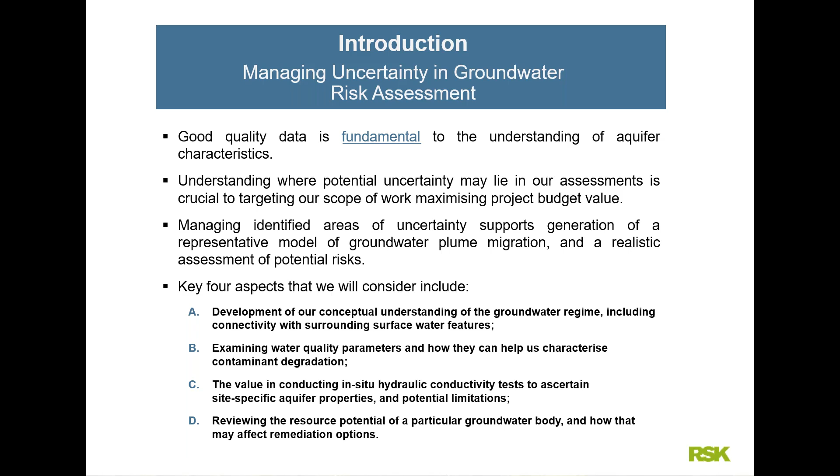We're also going to have a quick look at the value in conducting suitable in-situ hydraulic conductivity tests to ascertain site-specific aquifer properties and some of their limitations, and then also a quick look at reviewing the resource potential of a particular groundwater body and how that may affect our remediation options.

So the first of those aspects, developing our conceptual understanding of the groundwater regime — we're going to look at a case study, which is a vehicle manufacturing site located in the southeast of England.

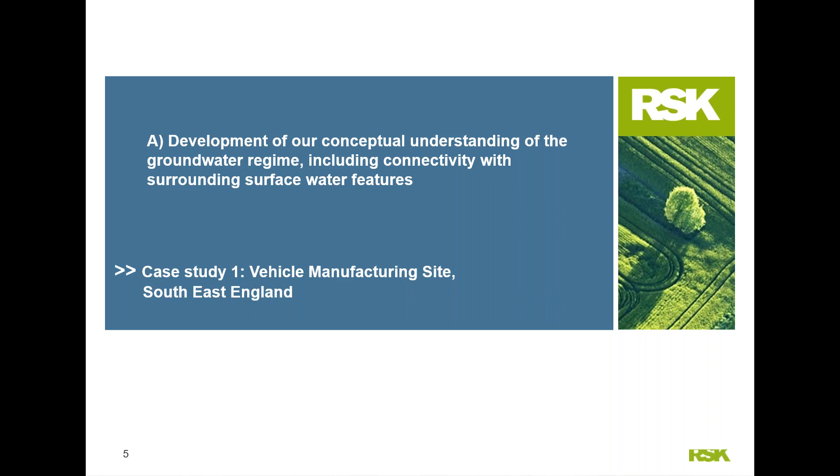RSK were requested to get involved on this site and review a raft of previous investigation information relating to the 30-hectare former vehicle manufacturing site. The site was proposed for a large residential development, including community facilities, schools, and commercial properties.

Overall, a total of 24 previous investigations had been completed across the various land parcels that made up the site. But crucially, there was no single report available to submit to the planning authorities which summarised all the work completed within the site boundary. Similarly, an overall remedial strategy was also required that encompassed the whole site rather than individual land parcels.

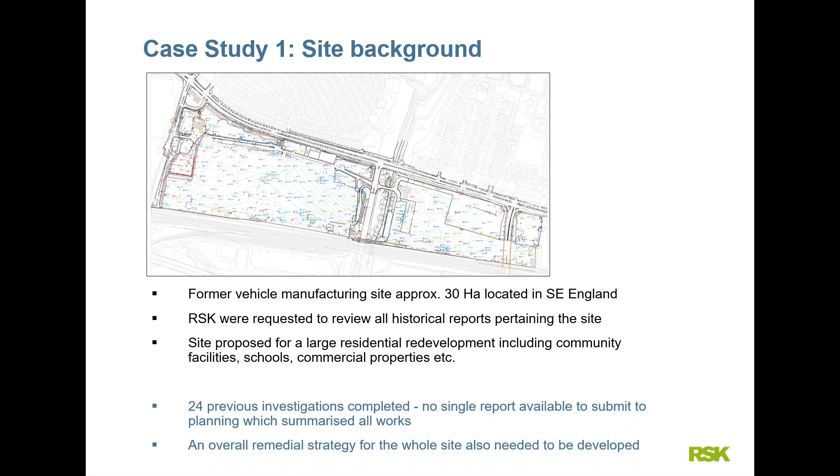In terms of the site setting, specifically the controlled waters receptors, in reviewing the site setting, numerous potential controlled waters receptors were identified. There was a river running from north to south through the centre of the site, with an infilled canal adjacent to the west.

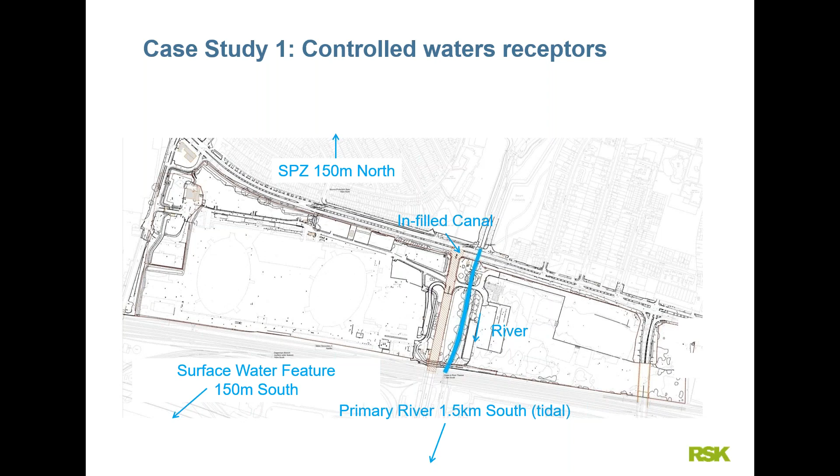There were also several surface water features located to the south of the site, including a tidal primary river located around 1.5 kilometres to the south, with the on-site river being a minor tributary to this primary river. Around 150 metres to the north of the site, there was also the outer limit of a source protection zone.

In terms of the site geology, the site is underlain by various water-bearing strata, as summarised in the table, with a basic geological sequence comprising made ground with pockets of perched groundwater within it, followed by alluvial deposits.

The alluvial deposits comprised cohesive layers with a peat horizon in between, and this horizon was classified as a secondary undifferentiated aquifer, with flow within that water body towards the on-site river, so west or east depending on which side of the site we were on.

Underlying the alluvial deposits, we moved into river terrace deposits, which were predominantly gravels, classified as a secondary A aquifer, with flow within those river terrace deposits towards the south, consistent with the direction of the river flow and the regional groundwater flow within that water body.

There was also a small 40 mil tidal fluctuation noted within the river terrace deposits groundwater levels, suggesting continuity with a tidal river that's located off-site to the south.

Moving through the river terrace deposits, we encountered Lambeth Group and Thanet Sands, both of which were classified as secondary A aquifers, and groundwater data within these water bodies inferred at least a degree of hydraulic continuity between the two groups.

The flow direction within these deeper water bodies was actually towards the north, towards the source protection zone. In the areas where the Lambeth Group was absent, the river terrace deposits had comparable water levels to those within the Thanet Sands.

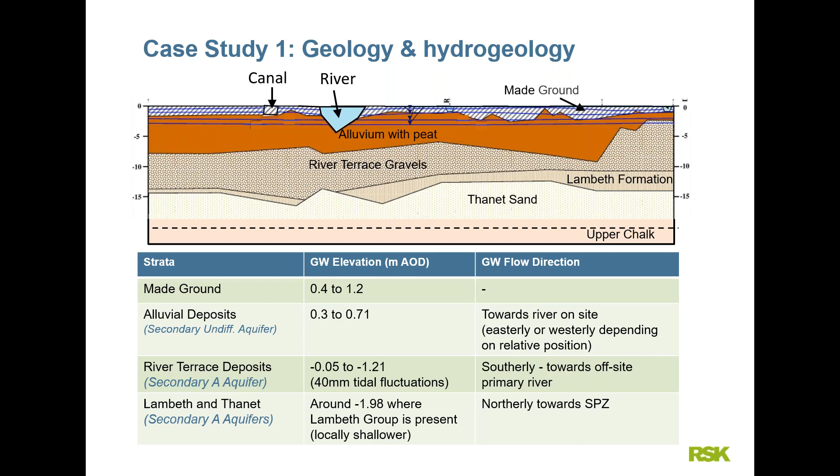But generally, the flow within the river terrace deposits was south towards the river. Finally, although not encountered on the site, the underlying bedrock at depth comprised the Upper Chalk Formation, which is classified as a principal aquifer, and regional data indicated a flow towards the north in this deeper water body, again towards the source protection zone.

So as we have seen, there are several water bodies present beneath the site, some of which are in continuity with each other and some of which are only partially or locally connected.

So in order to inform our conceptual site model further, we completed a survey of the river water levels and compared these levels to groundwater levels measured in nearby monitoring wells that were installed within the various strata.

The results of this survey, as you can see on the cross-section here, show that the perched water levels within the made ground were generally perched well above the varying river water levels.

Moving into the alluvium deposits, represented by the orange line on the cross-section, these were noted to be only marginally above the higher river level, but well above the lower level of the river.

Moving into the river terrace deposits, the green line on the cross-section, we were able to infer that the groundwater within the river terrace deposits was in continuity with even the lowest levels of the river level variations. And although not so shown on the cross-section, the survey of the base of the river level was indicated to be well above the level of the Lambeth Group and underlying Thanet Sands.

So overall, the assessment suggested that groundwater within the river terrace deposits and the alluvium, under some conditions, is likely to be in continuity with the river, whereas perched water within the made ground, and again the alluvium to some degree, may simply drain into the river.

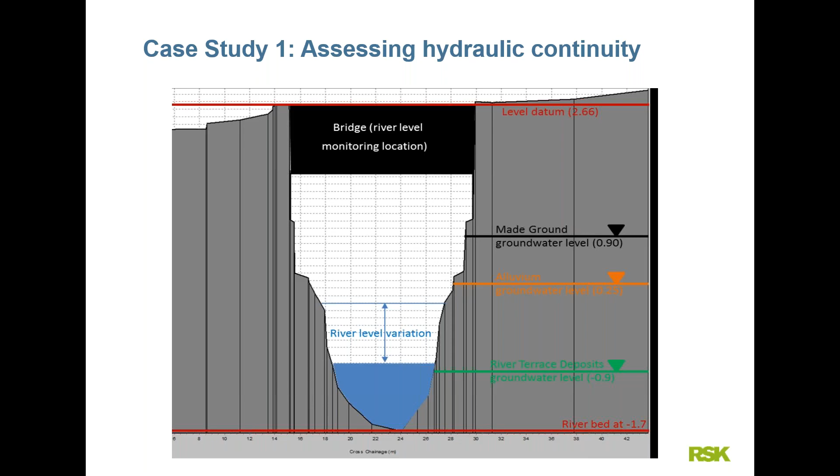So going back to the review of the previous investigation reports, which included a detailed quantitative risk assessment, we were able to make some key observations with respect to the prior understanding of the groundwater regime and the subsequent assessment of the potential risks to controlled waters.

There seems to be a limited consideration of the relevant potential controlled waters receptors when identifying the relevant assessment criteria to be used in the assessment, i.e. whether we're talking about drinking water standards or environmental quality standards.

When looking at the water bodies beneath the site, regardless of the connectivity with the principal aquifer underneath or the flow direction towards the source protection zone, highly conservative drinking water standards have been assumed across the board and applied in all of the assessments.

There was also minimal consideration of the brackish nature of the underlying groundwater, and also the fact that the site was located in a highly industrialised area. Therefore, the wider water quality and therefore also its resource potential was also known to be low, but this hadn't been considered in the derivation of assessment criteria.

So as a result, the previous DQRA that had been completed had derived some remedial targets, but these were considered unachievable and unreasonable. And it was therefore concluded that, based on our updated understanding of the groundwater regime, there was some refinement that could be completed on the conceptual site model and the conclusions of the risk assessment.

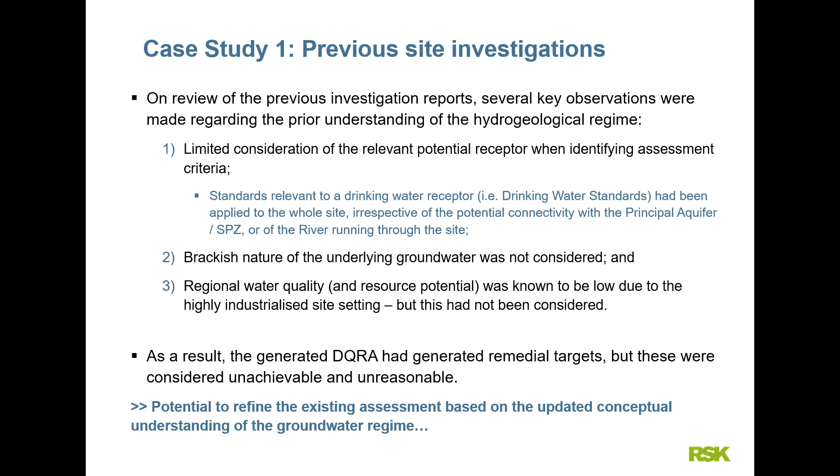Based on our updated knowledge, and in particular our understanding of the relevant receptors and their continuity with groundwater, the following updated conceptual site model was generated for the site in order to complete the first step of the risk assessment, the generic quantitative risk assessment. The key here was considering the relevant pollutant linkages based on each groundwater body and assessing the contaminant concentrations present within those water bodies against appropriate GAC, depending on the relevant pollutant pathway and the receptors in question.

So for the made ground, the alluvium and the river terrace deposits, this comprised an assessment of leachate and groundwater concentrations against environmental quality standards that were designed to be protective of the transitional estuarine and coastal waters, given our understanding of the continuity between these water bodies and the surface water features on and off site.

And then in terms of the underlying Lambeth Group and Thanet Sands formation, these were assessed against drinking water standards designed to be protective of the SPZ to the north and the fact that groundwater direction within these water bodies was flowing towards that SPZ.

In addition, an assessment of the regional water quality for each contaminant was also undertaken in order to assess the wider background concentrations of the various contaminants in the area.

Many of the contaminants that we had been considering were in fact found to be regionally elevated, so the upgradient concentrations on the upgradient site boundary were comparable to those on the downgradient site boundary, showing minimal variation across the site. On this basis, remediation on the site-specific scale was not considered to be warranted, as further ongoing risks to the surrounding aquifer was considered to be low.

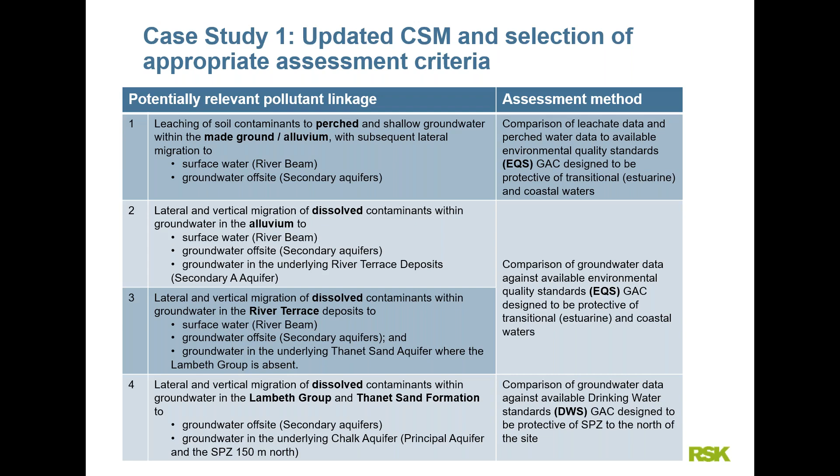So moving on to the second point that we're considering today, we're looking at examining water quality parameters and how they can help us characterise contaminant degradation.

The collection and interpretation of water quality parameters is key to characterising natural attenuation processes within the aquifer, and it's vital to understanding the key processes that may be contributing to the degradation of contaminants in the subsurface.

To characterise the potential for natural attenuation to be occurring, a robust conceptual understanding of the site is required in the first instance, including aspects such as the geology, the aquifer conditions, and also the contaminant concentrations and the potential for daughter products to be generated.

In particular, we can complete some fairly straightforward in-situ monitoring during sample collection that can provide us with beneficial water quality parameters that can provide a line of evidence towards understanding the potential for natural attenuation to be occurring.

And when assessing the attenuation of hydrocarbons, for example, the following water quality parameters should be collected in the field as a minimum, including aspects such as pH, dissolved oxygen, redox, temperature, and electrical conductivity.

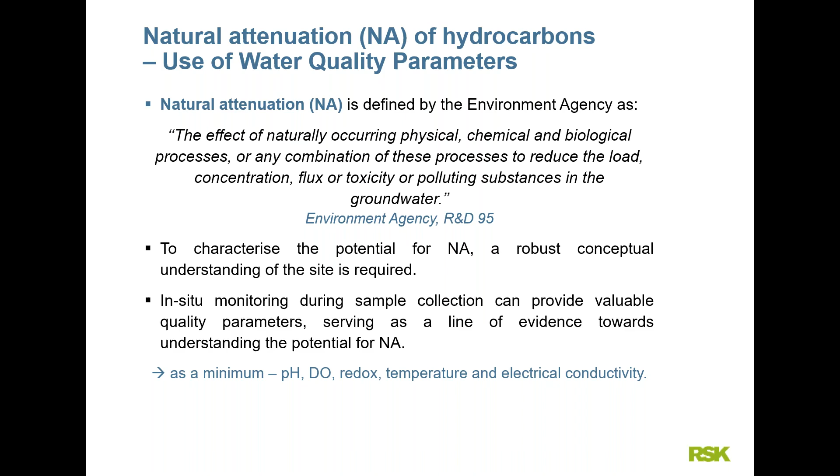So of these parameters, assuming that the groundwater pH is within the acceptable range to support biodegradation, 6 to 8.5, then we can look at the redox and the dissolved oxygen concentrations, and these will provide information on the type of metabolic pathways that are likely to occur in the aquifer.

Firstly, considering dissolved oxygen, we know that anaerobic degradation is unlikely to occur with dissolved oxygen concentrations above 0.5 milligrams per litre and will not occur at concentrations above 1 milligram per litre, whereas aerobic degradation requires the dissolved oxygen to be above 1 milligram per litre.

Similarly, looking at the redox values, we would expect to see mildly reducing conditions where our redox values range from minus 150 up to plus 50 millivolts, and then strongly reducing conditions below minus 200 millivolts. Similarly, above 150 millivolts, we would expect to see oxidizing conditions.

In terms of groundwater temperature, biodegradation will be slower at lower temperatures, and this can also affect the solubility of contaminants. So within the UK, considering our groundwater temperature is usually in the range of 8.5 to 11 degrees C, temperature can be a key factor when looking at biodegradation potential.

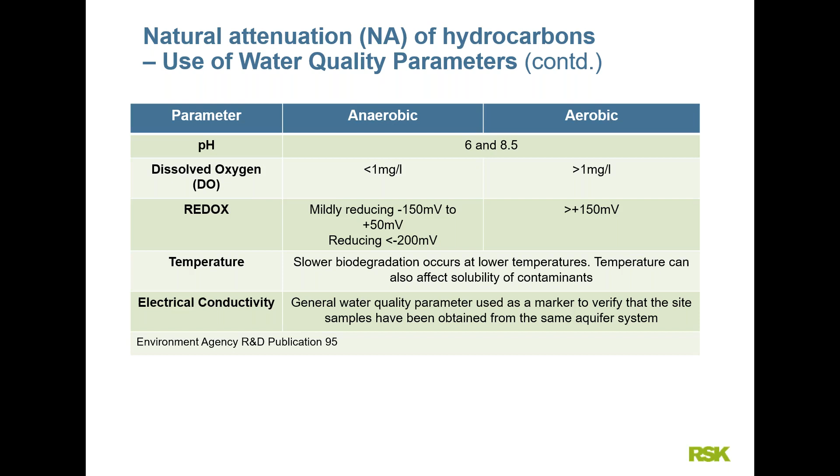And finally, in terms of electrical conductivity, this can be used as a general water quality parameter used as a marker to verify that the samples have been obtained from the same aquifer system to make sure that we're considering comparable samples.

As well as the in-situ aquifer data, we can also analyse our groundwater samples via laboratories for geochemical indicators of natural attenuation. To interpret these results, we consider that decreases in the concentrations of electron acceptors and corresponding increases in the concentration of metabolic byproducts provide indirect evidence for degradation.

Visual plots of the electron acceptors variation across the site, or of byproducts, can also help us visualize plume behavior, providing evidence for a shrinking, stable, or expanding plume.

As an example, referring to the aspects within the table, we would normally expect mildly reducing conditions to be associated with denitrification and manganese reduction. Subsequently, as the environment becomes more reducing, biological degradation continues on the basis of iron reduction, sulfate reduction, and methanogenesis sequentially.

A couple of points to watch out for when we're trying to interpret our geochemical laboratory data, with respect to denitrification.

The increase in nitrite within groundwater as a result of denitrification is rarely observed in our laboratory data. However, the relative reduction in nitrate concentrations within a plume is often noted, particularly when compared to higher background nitrate concentrations.

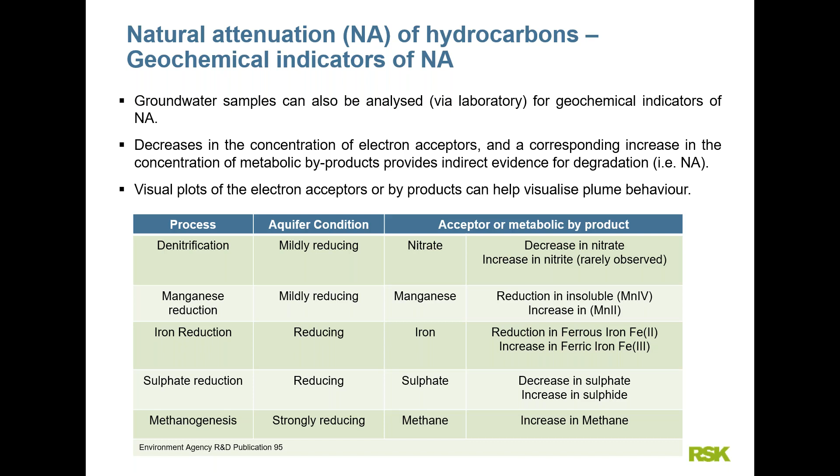To have a quick look at how geochemical and in-situ data can help us with characterising the degradation regime beneath the site, we're going to look at another case study: a petrol filling station located in Kent. It's an active petrol filling station in a mixed residential and commercial setting, with the closest residential properties around 20 metres south of the site. There's a primary river located 900 metres north of the site, and also the boundary of an outer source protection zone associated with an abstraction located 1.85 kilometres to the west of the site.

Previously, a programme of soils remediation had been implemented at the site due to historical fuel releases, and remediation had been undertaken as far as possible given the site constraints, but nevertheless some residual contaminants remained on site in the groundwater. So in order to assess the effectiveness of the remedial works and the impact of leaving this residual contamination in situ, a long-term programme of groundwater monitoring and monitored natural attenuation was commenced. The objective of this work was to understand the site groundwater conditions for the purposes of continuing environmental stewardship on the site.

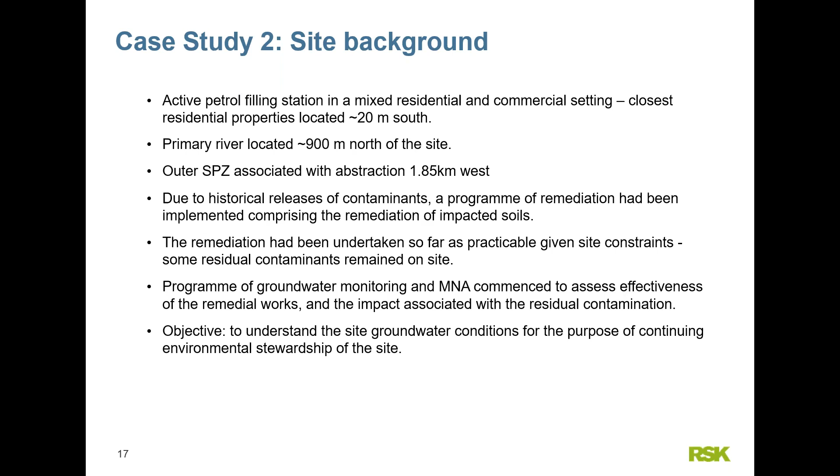In terms of the site-specific setting, the site is underlain by various geological strata, as shown in the table. Much of the site was underlain by made ground, moving into silty and clayey sands and gravels of the Taplow gravel formation, which was classified as a secondary A aquifer and noted to be dry during the drilling works. Underlying the Taplow gravel formation, we moved into chalk bedrock of the Seaford chalk formation and the Newhaven chalk formation, which was encountered as putty chalk becoming more intact with depth.

A groundwater body was noted within the chalk, with strikes during drilling starting at around 8 metres and rising to 5 metres below ground level, with flow within the groundwater body towards the north, in the direction of the primary river and the source protection zone. The groundwater data also identified dissolved phase concentrations of BTEX compounds - benzene, toluene, ethyl benzene and xylene - within groundwater in various areas of the site.

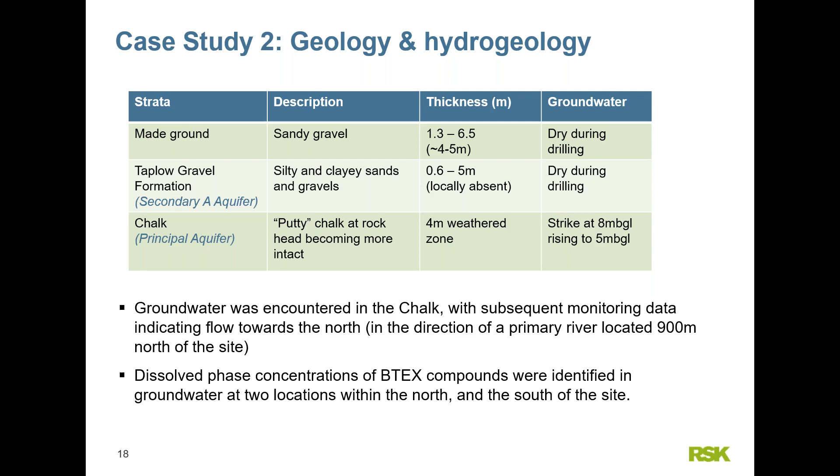Considering the full range of data, which in fact dated back to 2004, it was apparent that the down gradient northern plume had shown continuous reduction since 2004, with only limited concentrations remaining during the later monitoring rounds up to 2015. Whereas the up gradient southern plume area, whilst this has also reduced, is to a lesser extent and appeared to be stabilising in more recent years.

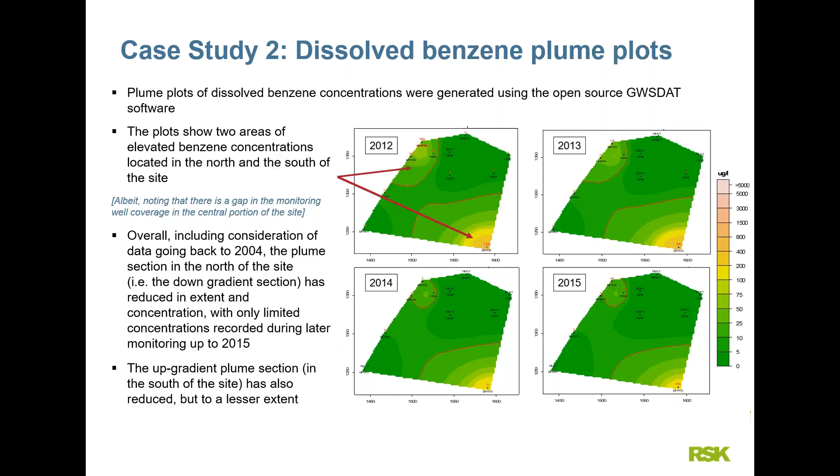Now, at the same time as the groundwater samples were being recovered by low flow groundwater sampling, we were also able to measure water quality parameters. A review of the dissolved oxygen and redox concentrations indicated mildly anaerobic to anaerobic and reducing conditions within the plume core, so within the north and the south of the site.

The presence of these sustained elevated methane concentrations was considered an indicator that methanogenic processes are occurring within those plumes. This ties in with the earlier data, the dissolved oxygen and the redox data, that indicated anaerobic and reducing conditions within the aquifer.

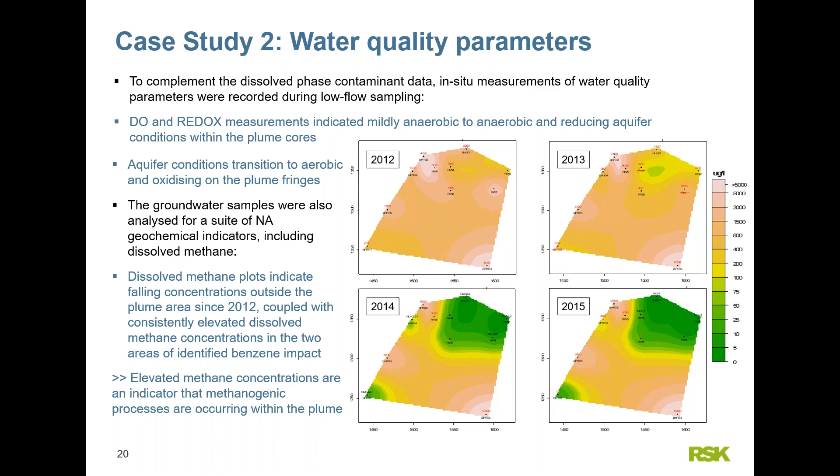So based on the evidence for ongoing natural attenuation, an assessment of the biodegradation capacity of the system is undertaken, considering the total BTEX concentrations beneath the site, in order to understand the potential for that natural attenuation to continue. Assessing the biodegradation capacity provides us with an indication of the amount of a contaminant that can be theoretically degraded by a particular electron accepting process at a site.

The assessment comprises calculating the difference in concentrations of the various electron acceptors at the up-hydraulic gradient site boundary, so considering the background aquifer conditions, and also looking at the conditions within the plume, and then dividing them by a utilization factor, which considers the preference of the various electron acceptors in being utilized by the microbes. This is a standard literature value that varies depending on the compound we're considering, detailed within the Environment Agency R&D P95 document.

Based on the calculations, we were able to characterize that the aquifer could theoretically provide the capacity for degradation of up to 17.7 milligrams per litre of total BTEX, compared to our on-site maximum concentrations of just 0.36 milligrams per litre. Overall, we were therefore able to reach the conclusion that the biodegradation capacity of the system is sufficient to degrade the present concentrations, with the primary mechanism in this instance being methanogenesis.

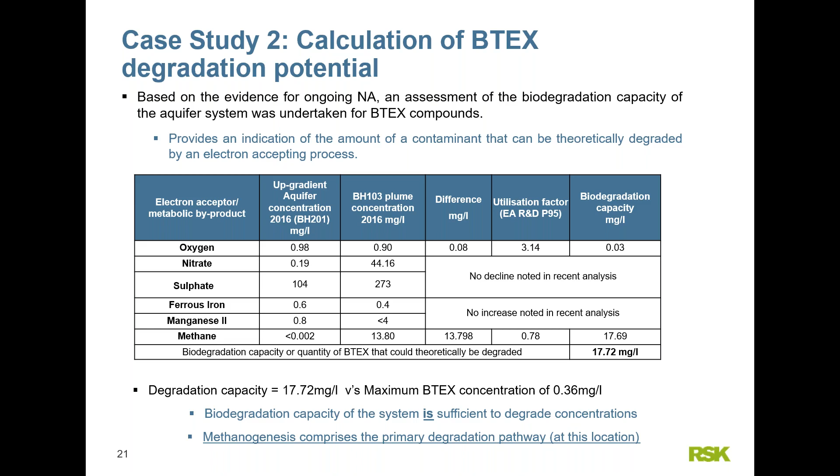On this basis, we were able to conclude that given the lines of evidence provided, continued natural attenuation of the residual BTEX compounds was feasible, and that no further remediation was likely to be required.

So moving on to the third point, looking at in-situ hydraulic conductivity tests. The identification of a representative hydraulic conductivity, or K value, for an aquifer is another way that we can aim to minimise uncertainty in our risk assessments.

If we don't have site-specific data, we're forced to rely on literature source values for typical geological strata, and these values can often range across several orders of magnitude, and it's simply down to professional judgment as to which value we select. The aquifer hydraulic conductivity is a highly sensitive parameter in contaminant fate and transport models, and it's important if we can constrain this as far as possible.

As an example, when we're considering a level 2 DQRA assessment, which considers the dilution of a contaminant as it enters the groundwater from the unsaturated zone, areas with a higher hydraulic conductivity result in greater dilution being attributed to more permeable soils. Looking at a level 3 assessment, which considers the dissolved phase contaminant migration within the aquifer itself, the K value influences the degradation potential for contaminants, with more permeable soils resulting in faster contaminant migration, and as a result, a reduced potential for degradation.

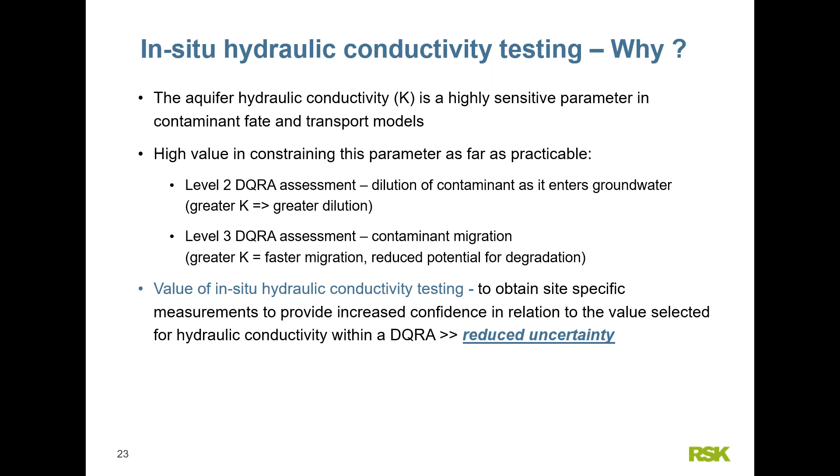So looking at our next case study, when we're assessing in-situ hydraulic conductivity tests, how do we do this?

It's most commonly completed via what we call a slug test, namely the introduction of a slug of fixed volume into the water column in a monitoring well, which results in an instantaneous change in water level, and then we monitor the change in water level with time as it recovers back to the resting groundwater level. A minimum displacement of the water level is required, ideally higher than 0.5 meters, but at least 0.3 meters, in order to make sure that we're testing the aquifer rather than the surrounding gravel pack of the well.

As such, it's important to note that traditional slug tests may not be suitable for very high permeability aquifers, as recharge may be so fast that recording the change in head cannot be completed sufficiently.

A couple of important points when considering slug tests. These are localized tests used to determine aquifer characteristics, and we need to optimize the robustness and value of the test data as far as possible. To do this, wells must be previously developed and then left to stabilize prior to testing. It's important to complete duplicate tests at each location to demonstrate repeatability, and these duplicate tests should incorporate both rising and falling head tests, as the recovery of each targets the saturated aquifer and unsaturated zones respectively.

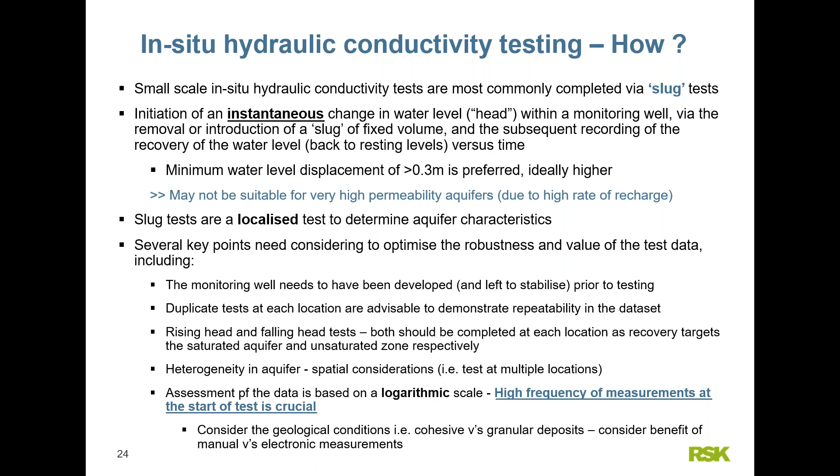On this basis, it's important to consider the anticipated geological conditions, i.e. whether we're going to encounter cohesive or granular deposits, and then whether or not we need to use electronic pressure transducers to monitor the recovery of water level, or whether we can manage this through manual measurements.

Looking at our third case study, a former factory site in Fife. This site was underlain by cohesive soils comprising clayey sand and sandy clay. Slow groundwater recharge was anticipated due to the cohesive ground conditions.

On this basis, the slug tests were completed using manual measurements rather than automated measurements, considering budget considerations versus the level of risk anticipated at the site due to the lower permeability material.

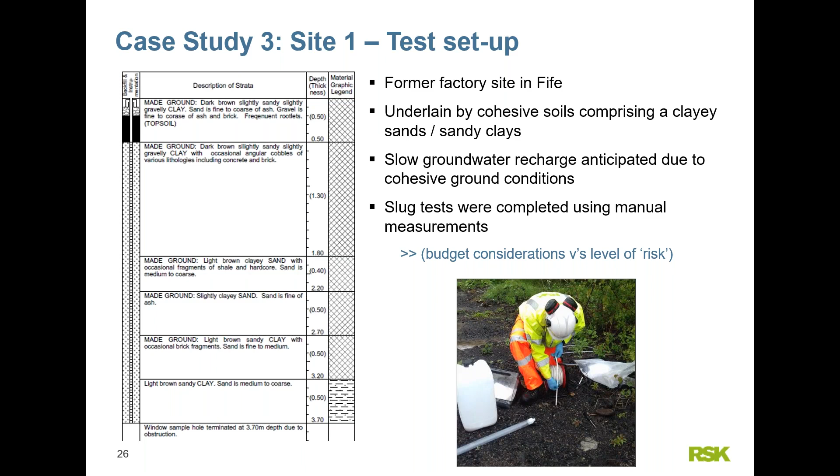The literature values for sandy clay range across 4 orders of magnitude, whereas completing the on-site slug tests allowed us to constrain this value down to within a single order of magnitude. The benefit of completing the slug tests therefore showed us that the hydraulic conductivity could be constrained to reflect site-specific conditions, thereby giving increased confidence in the model results.

However, in this instance, the limitation of completing the tests using manual measurements was that the earliest part of the data set, the first 10 to 15 seconds, was actually missed, and therefore there was a potential that we could have been under-predicting permeability if we had solely relied on the site-specific value.

So to take this additional uncertainty into consideration, a sensitivity analysis was completed as part of the DQRA, and during this analysis we varied the hydraulic conductivity by several orders of magnitude to test the results on the DQRA predictions.

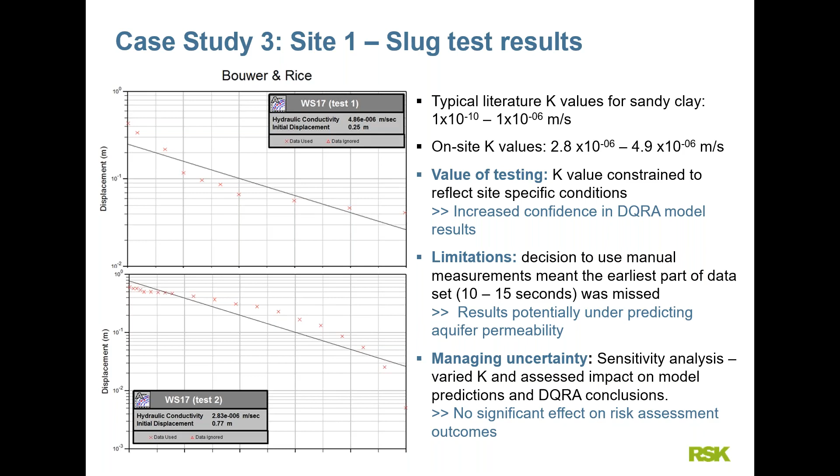The second site where we completed some slug tests was a petrol filling station in Aberdeen, and in this instance the site was underlain by granular sand and gravel deposits. On this basis, faster recharge was anticipated, and the slug tests were completed using pressure transducers set up to

record water levels on an automatic basis at 0.5 second intervals. However, crucially, we also used manual measurements as a backup just in case of equipment failure.

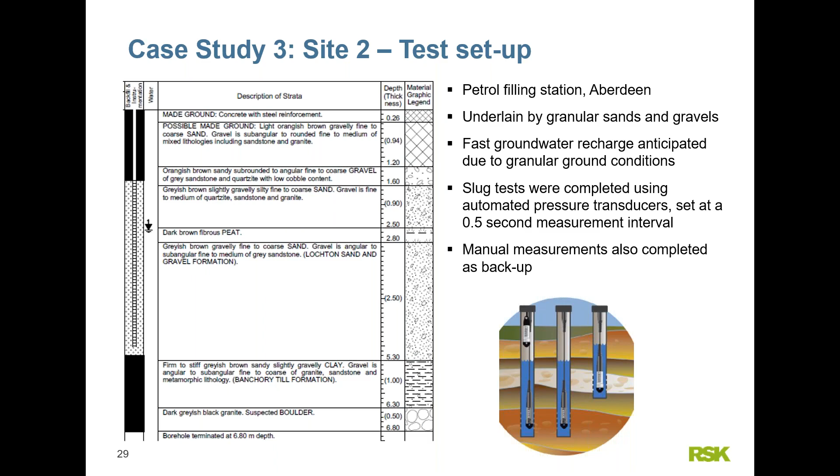Similar to the first case study, the slug test at this site enabled the site-specific value for the permeability used within the DQRA to be constrained down to within a single order of magnitude variation.

However, in this instance, whilst we were able to capture the early data set due to the use of automated loggers, we were only able to achieve minimal displacement of the water column due to the highly permeable nature of the strata, and therefore there is a potential that the results weren't necessarily reflective of wider aquifer conditions.

So to manage this additional uncertainty, calculations of the K value were also completed using the transmissivity and the saturated aquifer thickness, and the sensitivity of the model results to variations in the K value were also examined through the DQRA sensitivity analysis.

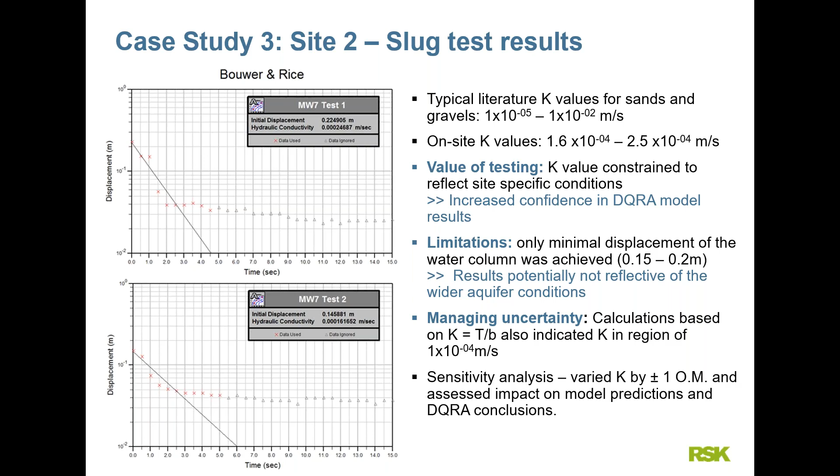So moving on to our final point, looking at the resource potential of a groundwater body and how that can affect our remedial options.

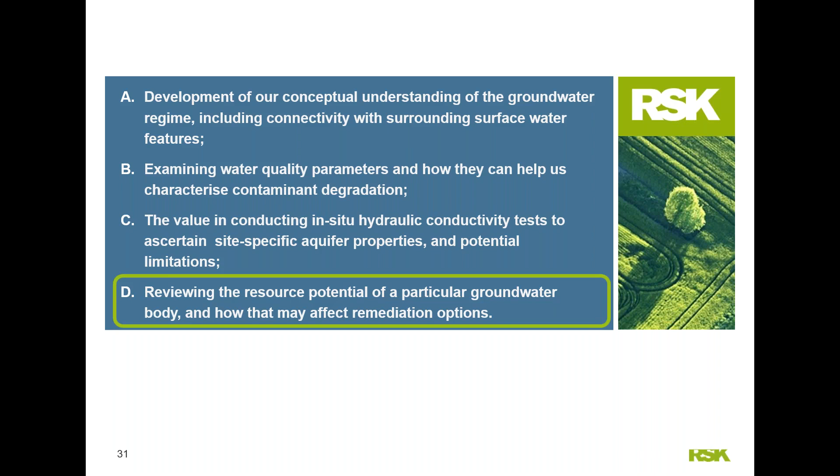Regulatory guidance on setting compliance points in a DQRA states that it may be justifiable to increase compliance point distances in a number of circumstances, i.e. beyond the default 50-metre point initially required if we're dealing with hazardous substances that are already present in groundwater.

Sustainability assessments would also come into play at this point, considering whether or not there is an overall net benefit or impact from any potential remediation that may be proposed. However, and crucially, extension of the compliance distance can only be done if there is credible information to demonstrate a significant physical constraint on the ability to use the groundwater resource in question.

These constraints can include where there's a present or future planned land use that limits exploitation of the water resource for the foreseeable future, such as sewered urban areas, forestry, or major infrastructure development. Topography can also limit feasibility, such as steep or inaccessible land or areas with unsuitable access, and also natural limitations such as potential aquifer yield or natural background water quality. In some instances, the water quality may be so poor that treatment requirements would render future development of the groundwater economically less viable or unlikely.

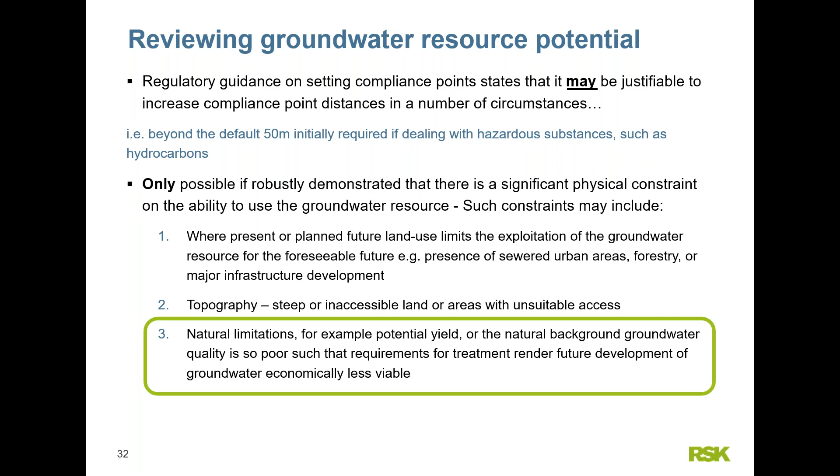So for the next and final case study, we're going to look at this last constraint: the implications of natural limitations on groundwater body resource value.

The final case study is a former fuel storage depot in an area of reclaimed land adjacent to the coast. Intrusive investigations completed at the site had identified that fuels had been released from leaking fuel lines and spills at the site. Remedial works had removed in the region of 6,700 kilos of hydrocarbon contaminated soils, and LNAPL had also been detected during the remedial works.

This had been removed as far as possible based on visual evidence, with no observable LNAPL remaining within the wells on the site. However, following completion of the remedial works, elevated concentrations of petroleum hydrocarbons remained in the groundwater in the made ground and the principal limestone aquifer beneath the site.

A detailed quantitative risk assessment had been undertaken using default compliance points, and this had concluded that groundwater remediation was required in order to achieve the target concentrations derived for the site.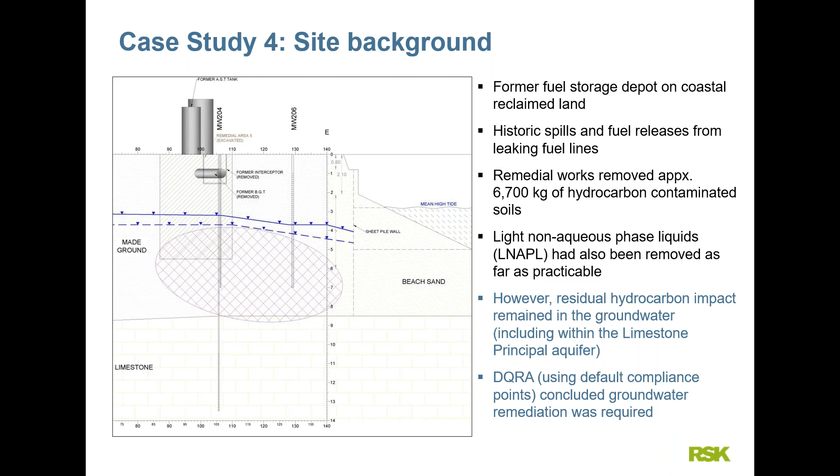So in order to refine the controlled waters risk assessment, we first completed a simple qualitative assessment of the aquifer's resource potential. This included investigation of desk study information that identified the site was actually within a 5-kilometre buffer zone where there was a threat of saline intrusion affecting water quality.

On this basis, if groundwater abstraction was to be proposed in the future, license restrictions were likely to apply. It was considered unlikely that groundwater resource extraction, particularly for potable supply, would be granted licensing on this basis. Furthermore, the site was located within a heavily industrialised area on reclaimed land, and therefore there was the likelihood that groundwater quality was impacted on a wider scale, further reducing the feasibility of future groundwater abstraction.

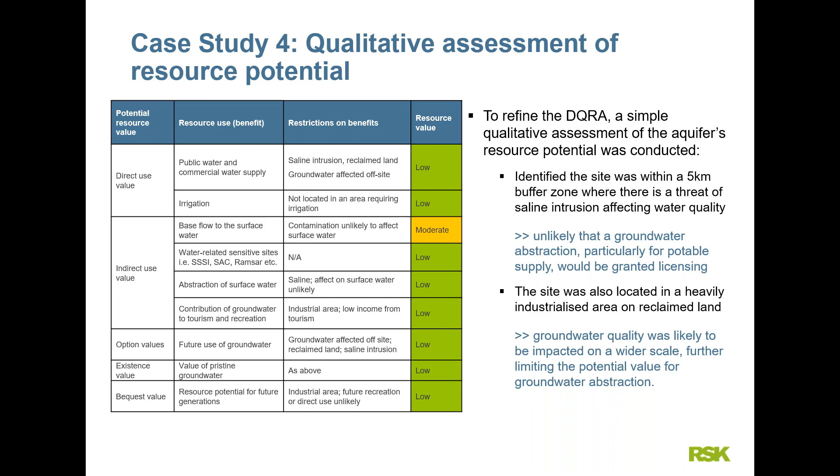Following the initial qualitative assessment, we moved on to perform a cost-benefit analysis of various remedial options. To complete the assessment, it was first assumed that groundwater beneath the site is worth 10% of its pristine potable water supply value, due to the inferior nature of the background water quality.

A comparison of the aquifer value was then made against the various calculated remedial options, and it indicated overall that the remedial costs significantly outweighed the assumed worth of the aquifer beneath the site.

Following a subsequent sustainability assessment and assessment of natural attenuation potential, which indicated that the plume beneath the site was shrinking, it was agreed with the Environment Agency that remediation was not required or justifiable. This demonstrates the value of considering the resource potential and managing uncertainty with regards to the groundwater in question, rather than taking a more generic approach.

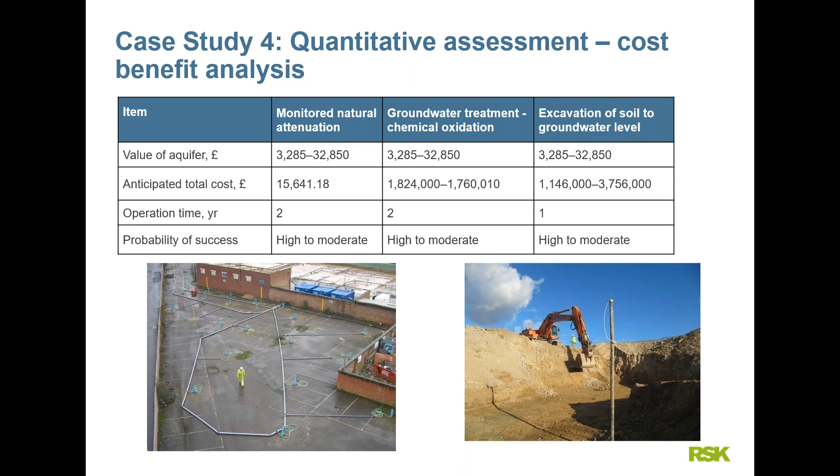So just to summarise, when managing uncertainty in groundwater risk assessment, good quality data is fundamental to understanding our aquifer characteristics and generating a realistic model of groundwater plume migration and assessment of risk.

Understanding the hydrogeological conceptual site model is key to enabling appropriate assessment points and assessment criteria to be derived for each pollutant linkage. During this assessment, consideration should be given to designing suitable investigations, including site-specific data that will enable sensitive hydrogeological parameters to be constrained within our risk assessments, including aspects such as degradation conditions and the hydraulic conductivity of the aquifer.

Any remaining uncertainties and limitations still outstanding within the conceptual site model should also be considered as part of our DQRA, through aspects such as sensitivity analysis and model calibration, or else targeted via additional investigation and/or assessment.

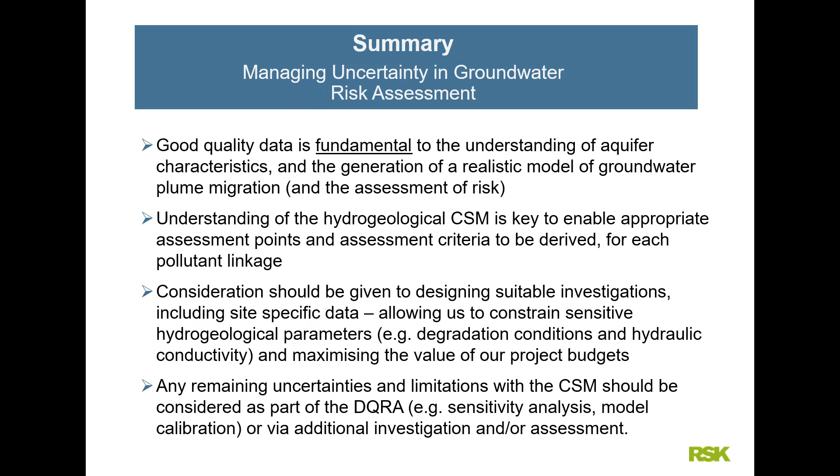Thank you, Mel. Really interesting talk. We'll get straight into some Q&A, if you're okay with that.

That's fine. First of all, what's the minimum number of monitoring wells and rounds of data that you would need to characterise an aquifer?

Okay, that's a fairly open-ended question. It fundamentally would come down to our conceptual site model, how complex the ground conditions are that we're anticipating beneath the site, and the level of risk associated with it. It goes back to the preliminary risk assessment and developing a robust conceptual site model from the outset that allows us to determine which areas will be the risk drivers and where we need to target subsequent investigation works. It might be that for a complex site we need to consider a phased investigation.

The key point is always going back to our initial conceptual site model, refining our understanding, and then identifying the uncertainties and data gaps as we go through, trying to refine those. If we end up at the DQRA stage and there are still uncertainties we haven't been able to bottom out, that's when sensitivity analysis comes in, allowing us to test the robustness of those assessment conclusions and the implications for the recommendations we're making. So there's no simple answer, but the conceptual site model is the fundamental point to go back to.